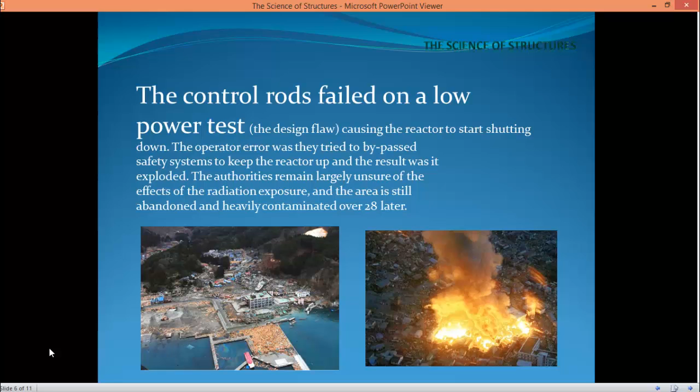And now here, 28 years later, that city remains vacant. Nobody can live in it. It still has high radiation, and it's intolerable for people to live in.

This one is studied when people become structural engineers. This was the worst disaster up until the time that we had 9/11. It was two walkways that were in the lobby of a Hyatt Regency hotel. And the contractor asked for a design change. And the structural engineers allowed that design change without really looking at it, and they were found guilty of gross negligence. So on July 17th of 1981, the two walkways collapsed, and the lobby was filled with people having a dance.

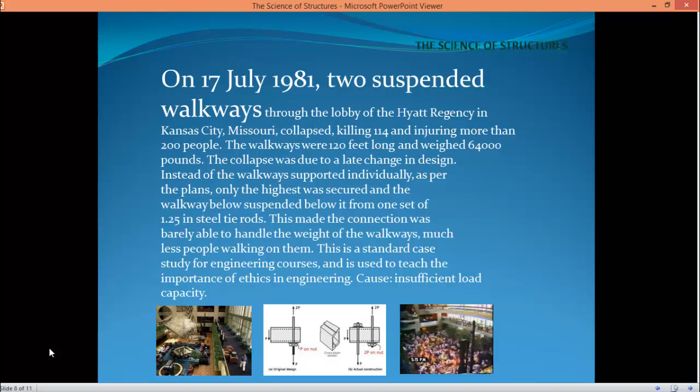And they found out later that the two walkways weighed 64,000 pounds. And the late design change put more pressure on the upper walkway; instead of having them both have equal support, the upper one had all of the support, and if you did the numbers, it couldn't even support itself, much less the other walkway, and it just collapsed. So they had insufficient load capacity.

So structural engineering is usually considered a discipline within civil engineering, but they ensure that our buildings and our bridges are safe through all kinds of things. They also design structures to be stiff enough so they don't vibrate beyond acceptable limits. And a classic example of that happening is the Tacoma Narrows Bridge that beat itself to death. And there's also fatigue, so there's variations that they have to build in when they give a stamp and say, we can build this.

Their job really is to prevent or reduce loss of life or injury. Below, on the bottom of this page, you can see some FEA examples, finite element analysis examples. And there's lots of programs that they can use to come up with examples. And so this actually shows the failure rate in colors. So the blue would be solid as a rock, and then it goes down in different colors, and red is

that you've got trouble. So the suspension bridge is really secured at two ends, and that's stable at both ends, but as you get to the middle, well, over time it could get worse even. It's still safe. The abutment for a freeway has red on it already, so that one is bound to fail. It needs to be redesigned. And if you ever drive into a parking garage, take a look at this one and know where the weak points might be in that parking garage so you don't park there.

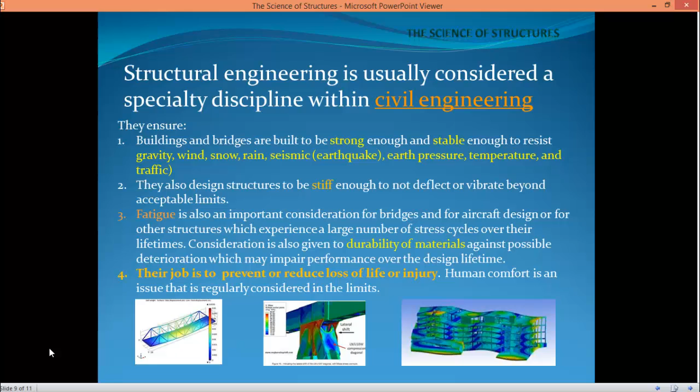But anyway, they basically determine or analyze these structures. And talking to structural engineers, I have found that they want people to take responsibility for the calculations and to have some idea about what it would be, because when they crunch the numbers with computers or computer programs, if everything isn't in there correctly, the numbers could be way off, and they have to be able to know if those numbers are correct or not.

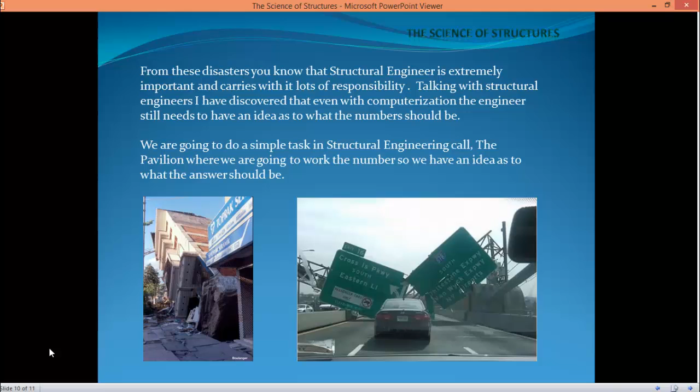And so we're going to do a simple task in structural engineering called the pavilion, and we're going to work the numbers to figure out if it's going to be safe. And to do that, we're going to use our program, which is ArchiCAD, which is a building information modeling program. There is a tutorial on the instructor portal that goes step by step on this, and so after we finish this, then we can get busy on the project, which is the tutorial. But I'm going to give you a brief overlook.

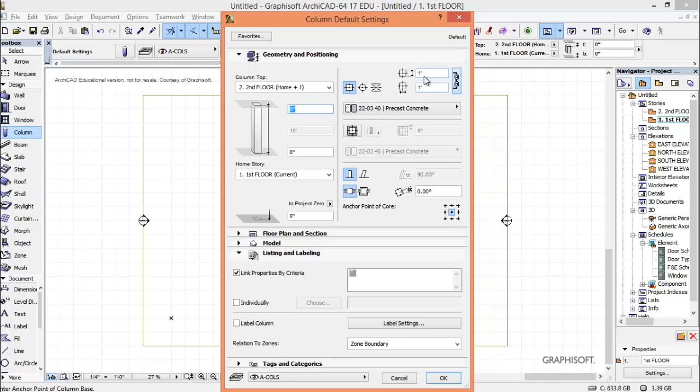We're going to place in a slab. I'm going to give it a beginning point, and I'm going to use the tab key and put in 36, and it defaults to feet, and then tab again and put in 24, and then enter, and I've got my slab. Next, we're going to put some columns, and we're going to put in columns that are 1 foot by 1 foot, and they're going to be right now on each corner. When I see the check mark, I know that that is connected, and apparently these are measuring from the center point.

So we're going to go in and quickly fix that, because we want those to be on the slab itself. So I'm selecting the arrow so I can edit. I'll take this grip and move it so you can see it's easy to move them. And now what we're going to do is put on a roof. They're 10 feet high, by the way. So I'm going to double click here and make that 10 feet.

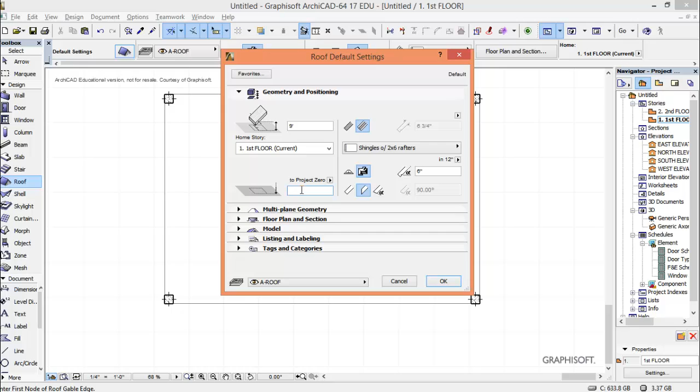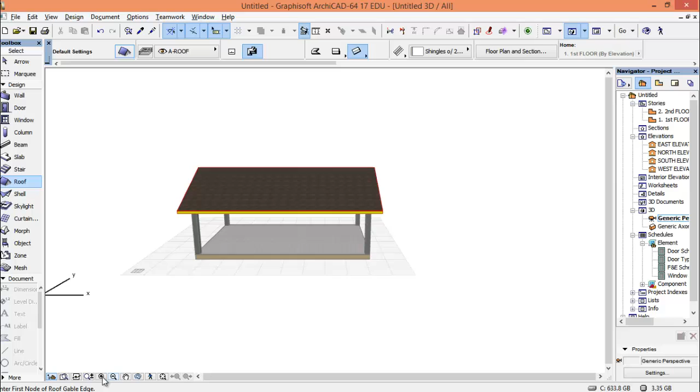And the roof is going to be a gable roof. So arrow over till you see gable. And the way you put on a gable roof is you pick a point here and select a point here and then slide it up. And there we have it with some offsets, some default offsets. And this is what we did. This is the beginning of our pavilion. And we want to make sure it's safe so that when people have picnics under there or they run under there for safety in the rain, that it's not going to fall on them.

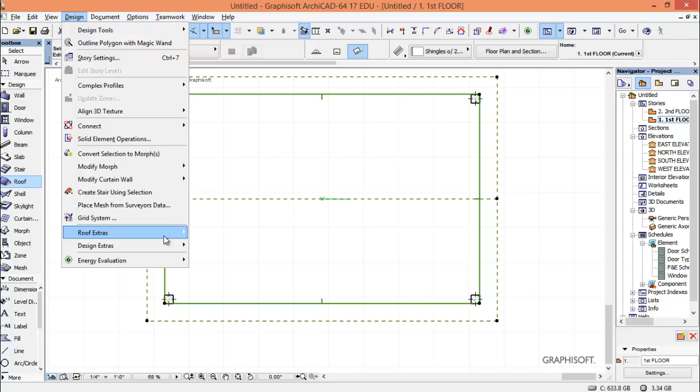Let's go back to the first floor, and we have roof highlighted here. If I do Control A, it will find every roof, and there's only one. And we're going to go to Design, Roof Extras, Roof Maker, and the Wizard. Everybody likes a wizard. Now you can change the width of things, and you can change the way things are here. But we're going to leave it just as it is.

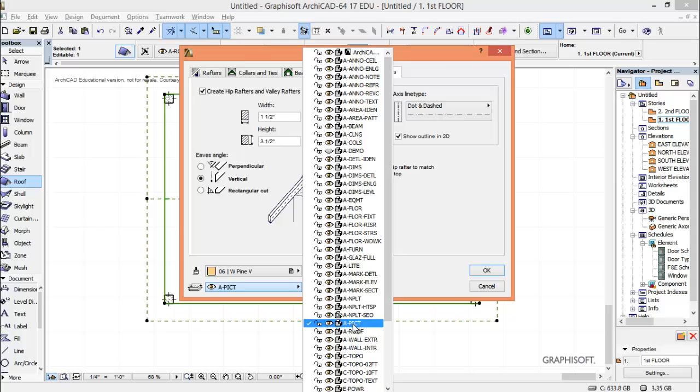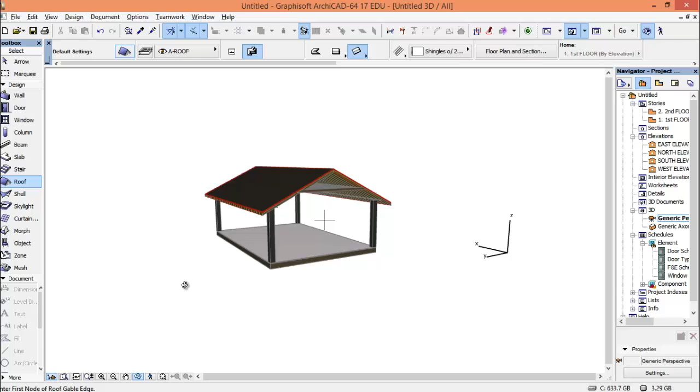But we are going to change the layer. It was on A-ROOF, and we're going to change to an A-PICT layer so that we have the roof and the beams on a different layer. We're going to say OK. And now the computer is calculating for us. And there we go. Let's take a look at that. And in order to see it, we are going to do a Control L for layer and take off the roof layer, because we put that one on an A-PICT layer and it's on, so we can see the rafters in there. And now what we're going to do is we're going to calculate.

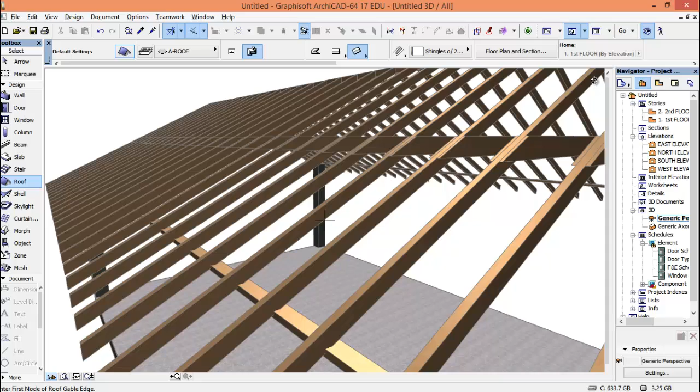Whoops, I zoomed in just a little bit too much there. But anyway, we're going to calculate the rafters, and this is what I meant to do. So the weight of the rafters, and you'd be surprised at how much that wood weighs, and then figure out the load that these columns can take and see if it would be safe to build, if the people underneath it could be safe. So that is the project for today.

And I guess you could kind of see if you would like to go into civil engineering with this project as well. So have fun, enjoy doing it, and thank you for listening.